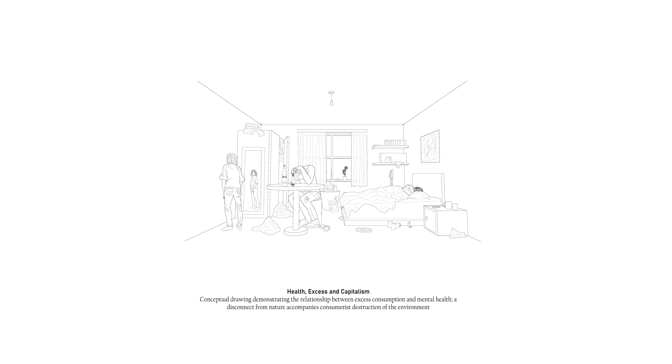It is not a simple rehabilitation of the human mind and body, but a rehabilitation of the landscape. As such, the design of the building cannot be divorced from an interrogation of its role as an object observing the performance of the changing landscape.

It is a simulation and reappropriation of the sense of memory evoked by the same scars of capitalism and industrialization that have left people with mental health and psychosomatic disorders.

This is examined here in a drawing relating the traumas deriving from capitalism to the typology of a messy bedroom, isolated from the natural environment. The process of rehabilitation hence involves a progressive reintegration of people into the landscape to enable both their own and the ground's recovery, with access to spaces charting their personal progress.

Hence, the rehab can be understood as a machine for human rehabilitation and rehabilitation of the landscape. The processes are related, with the patients becoming critical components of the mechanics of landscape renaturalization, and the form of the building negotiating and subsiding to the conflict between the controlled interior and organic exterior.

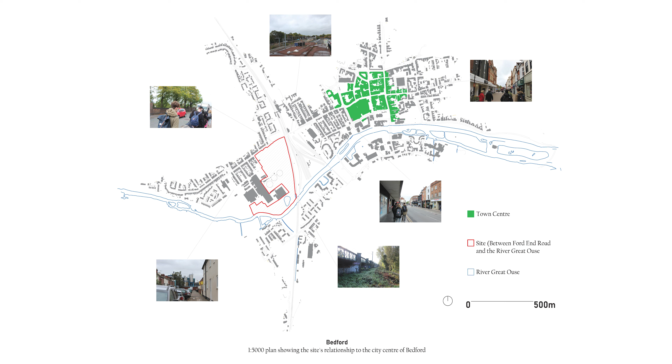Over time, in its improvement of the landscape, the building slowly becomes overrun by its own success and is destroyed. Bedford is located along the River Great Ouse, with the site being an interstitial terrain vague, located surprisingly close to the city centre, between Ford End Road, the railway, and the river.

As such, its hostile elevation of danger signs and barbed wire protrudes a slight sadness, communicating the sense of abandonment and deindustrialisation that upsets the surrounding area.

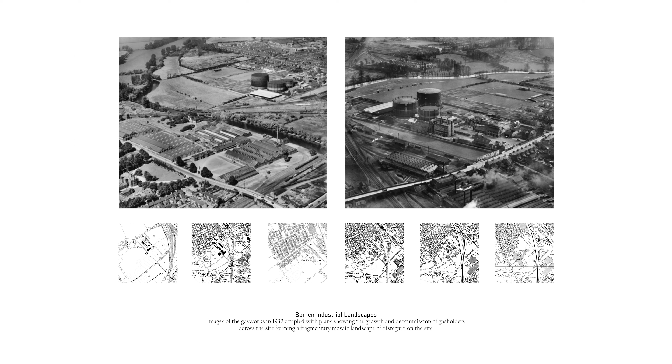An examination of the industrial past of this part of Bedford reveals a more landmarked quality to the site, something lost with the removal of the gas holders that used to occupy it.

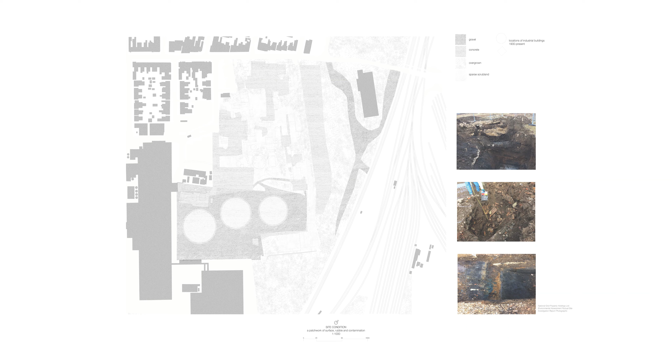In this, the site can be interpreted as a memorial landscape, with the ground condition revealing a fragmentary mosaic of landscape of disregard, where tarmac, gravel, and old foundations both allude to the town and the site's industrial history and poison the ecosystem.

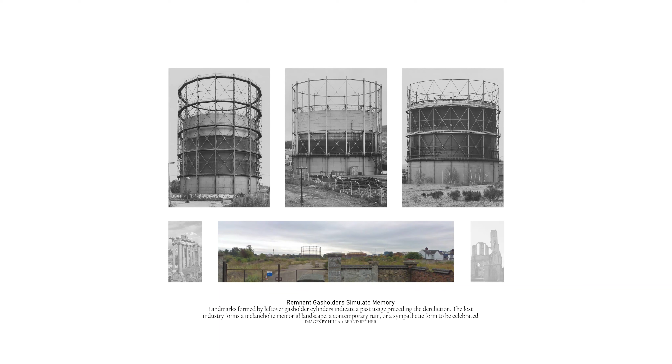Indeed, gas holders themselves are contemporary ruins, rendered redundant by modernised processes.

Their empty shells are sublime simulations of memories lost with their removal. In its current form, the site is barren, with a few weed trees and weeds communicating the dereliction of the ground. As such, the first stage of recovery demands a recovery of the landscape into something suitable for growing and reforming an ecosystem.

Georges Descombes' renaturalisation of the River Aire project saw the excavation of a diamond grid of ditches along the route of a river in a manner that allowed the river to form its own path and break up the soil in a manner to enable plant growth.

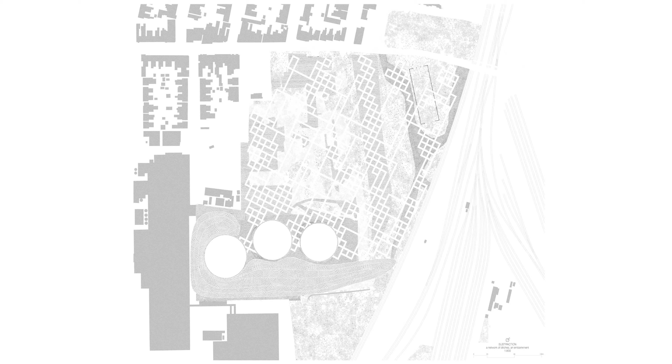A similar proposal seemed appropriate for the site. Removing earth to form 2-metre wide ditches in a particularly dense pattern around the more contaminated areas creates an opportunity to use the gentle slope of the site and the fact that the site forms a topographical sink for the rest of Bedford when flooded.

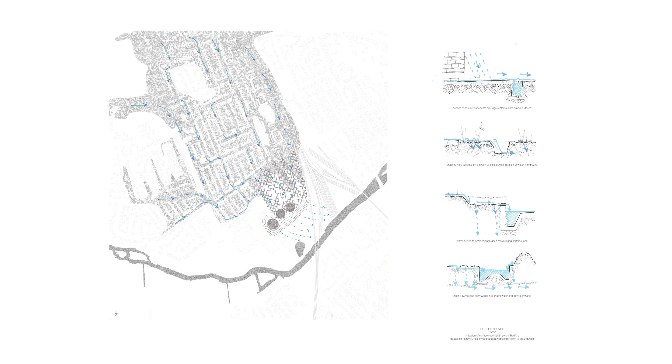This would send increasingly common floodwater from the town, owing to the climate crisis, into the ditches, leading down to pools formed by three exposed gas holder foundations.

In doing so, the water would gradually erode away at the harsh edges of the ditches, changing their condition into a more naturalised form, whilst also breaking up the dense contaminated soil in a manner that would allow for an easy planting of hyperaccumulators.

These are plants that can be used to naturally phytoremediate the ground, as they are biologically predisposed to take up the heavy metals and contaminants that scarred the landscape. When removed, gone are the damaging materials.

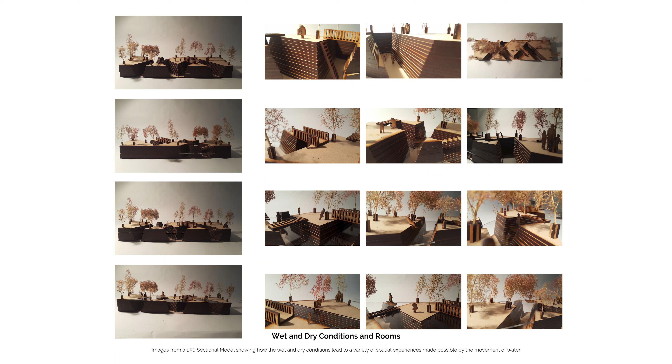The process of flooding and drying would allow the site to oscillate between a temporal wet and dry condition, creating varied spatial experiences between the growing trees and plants.

On a more macroscopic timescale, this iterative erosion would create a much more natural form of ditches, and a remediated landscape with a thriving ecosystem, in stark contrast to the current neglected space.

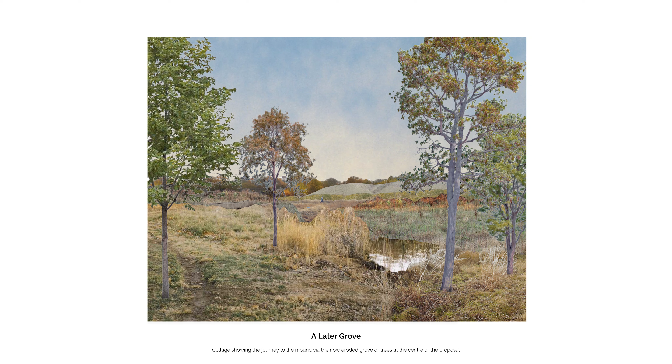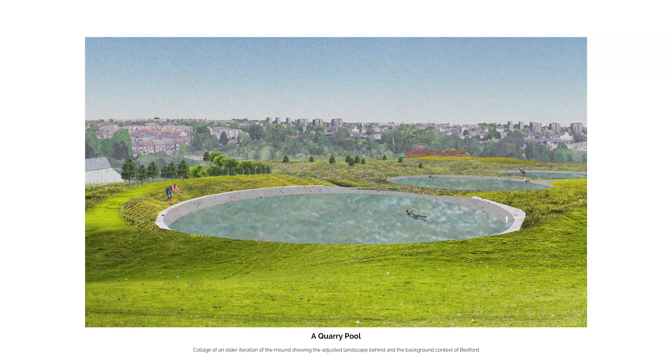These spaces would lead down to the pools, bound by a mound of excavated material, where the retained water would make an appropriate space for bathing. In this process, the remediation of the landscape unifies a civic action in the formation of a public park with a flood defence and a renaturalisation of the site.

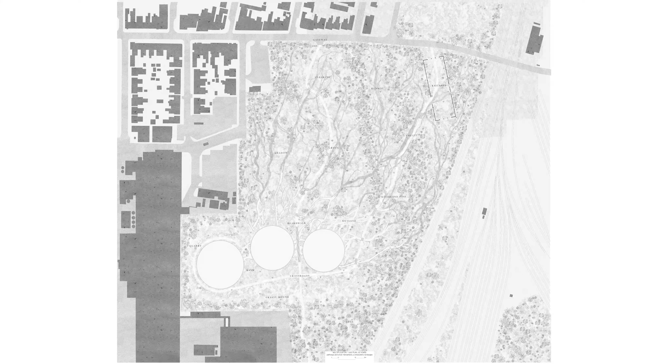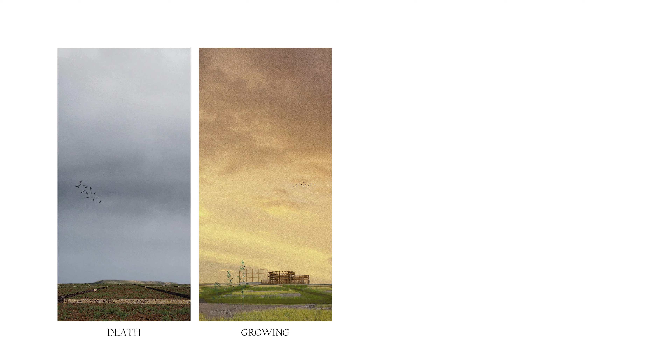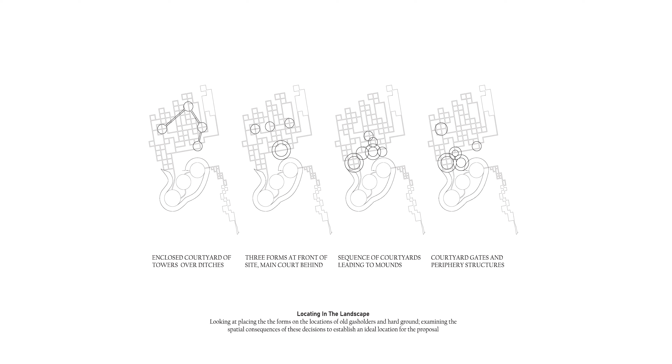The growth of new plants and the beginnings of recovery of the site mirrors the growth of the new structure, which seeks to echo the memory of the past gas holders in its relationship to the streetscape. The location of this form was considered against an expanded ditch network, which allowed for increased space for plant growth, while also zoning the expansive landscape into different areas between and around buildings, which can be sequenced to create a theatre and a sequence of spaces moving between open landscapes into varying sizes of courtyard.

I sought to use this structure to create spaces for multiple forms of therapy and occupation, maintaining a relationship with the landscape. The final iteration settles on a distinct zoning of the site, with the open network of ditches leading down through the structure into a courtyard of low planting, bound by a more formalised mound.

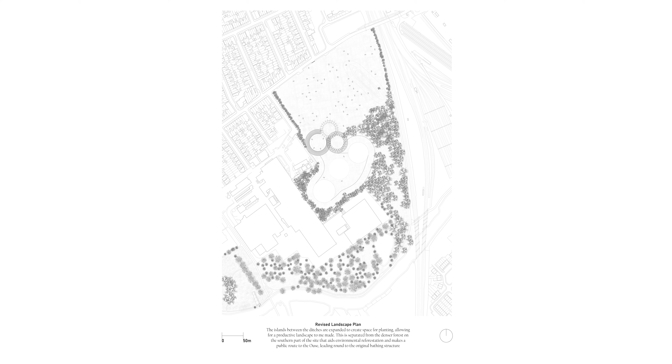This open area is separated from a denser forest of new willow trees leading down to the river. The round forms create a defensive structure that allows for panoramic views of the landscape and creates a threshold of privacy where the main sequence of courtyards are controlled and separated from the evolving surrounding landscape.

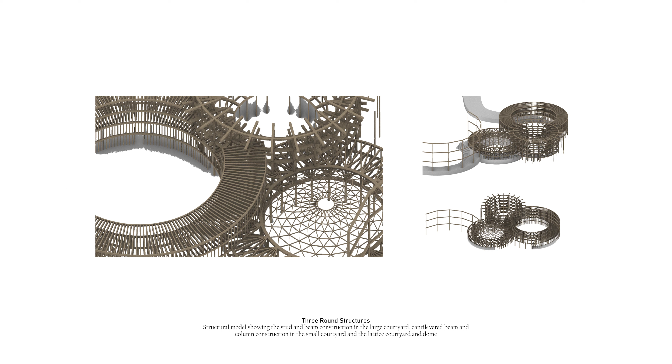The glulam structure combines a series of column and beam constructions of varying densities, resulting from tests matched to the program of each courtyard, with this page showing the materials used to eventually build up the structure into a rehab. Although the structure demonstrates a quality beyond its ephemeral human use in its relationship to the landscape, there's a distinct phase that accompanies its human rehabilitative function.

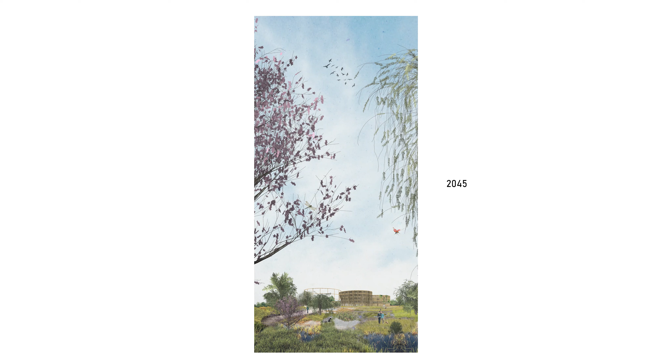There's a distinct phase that accompanies its human rehabilitative function. After 25 years of naturalisation, one might expect the rehab to sit amongst a more renaturalised landscape, one it is immensely integrated with, mirroring the site's development.

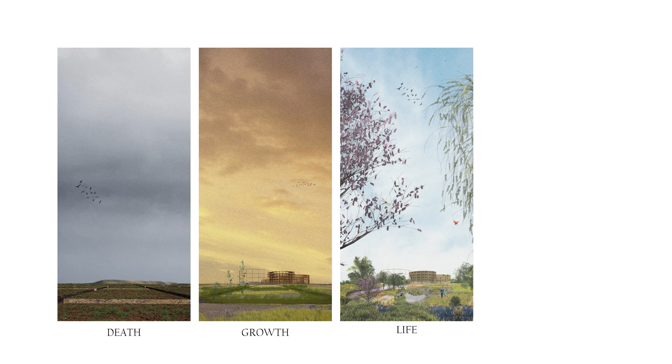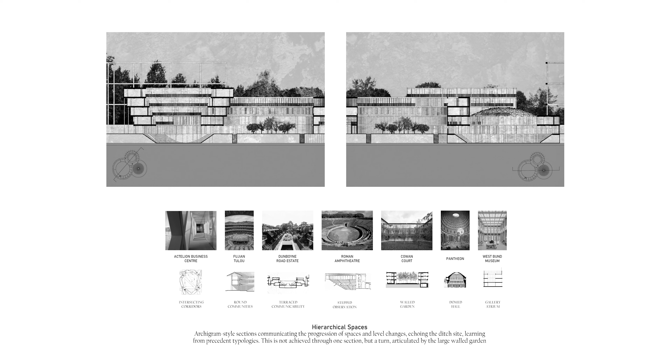I sought to create a variety of spaces at different scales to engage in therapeutic activities related to the landscape. Iterations of the design compared elements of the courtyards to different precedents and adjusted them to create a controlled yet theatrical sequence of spaces to accompany the temporal progressions of the surrounding ditch landscape.

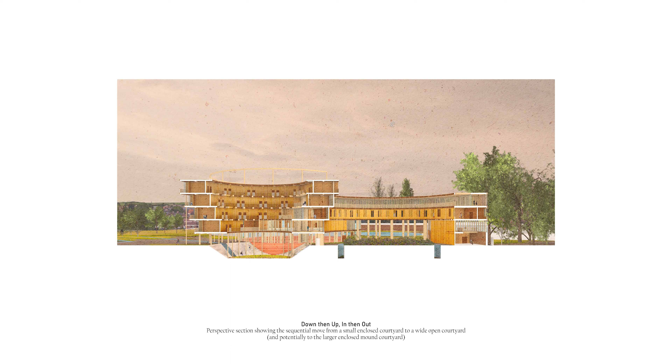This sequence begins with a progression that takes one from a small enclosed courtyard, below a small step-back Tulou-style courtyard that allows for the penetration of light, back up into a large, wide, open-walled courtyard leading around to the large courtyard of pools created by the mound, or down into the large hall courtyard, which embodies an unexpected delight in the act of moving down into a surprisingly large enclosed space.

The perspective sections show how corridors are created at the intersections of the courtyards. The loops of the floor plans intersect such that continuous, cornerless corridors are created, something not enabled by previous rectangular iterations. In this way, the scale of the progressively longer loops of the floors can be used to chart the progress of a healing patient.

They might begin by only being able to walk around one floor, but can move to larger floors, the whole mound, and soon the entire landscape as they progress in their recovery. As such, they can become progressively more integrated with the recovering landscape.

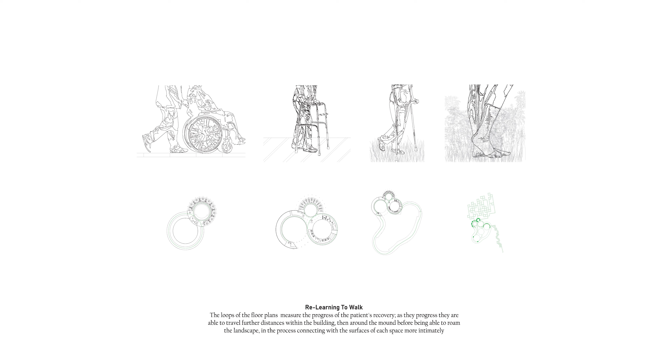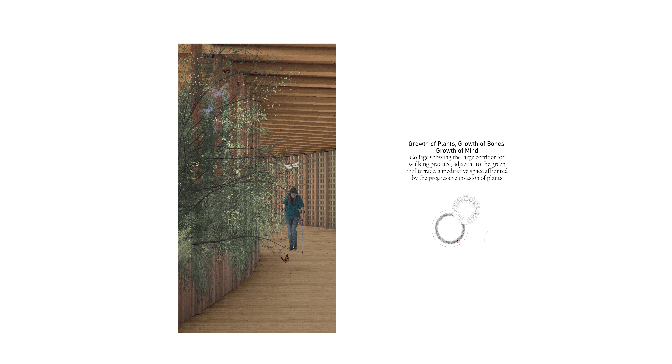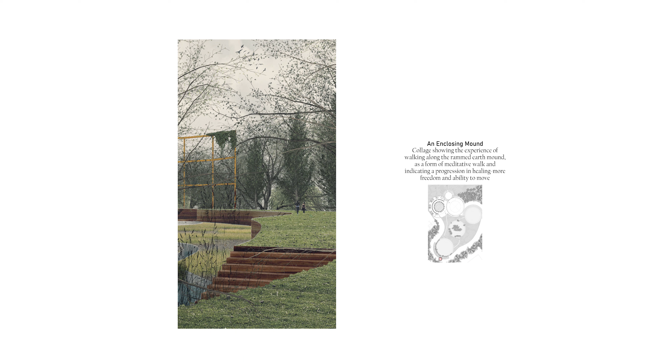This is along a walk landmarked by the new timber gas holder frame. This shows how compacted rammed earth and lime are used to make the mound.

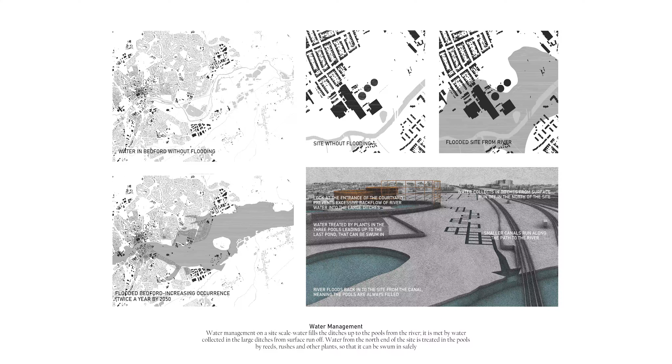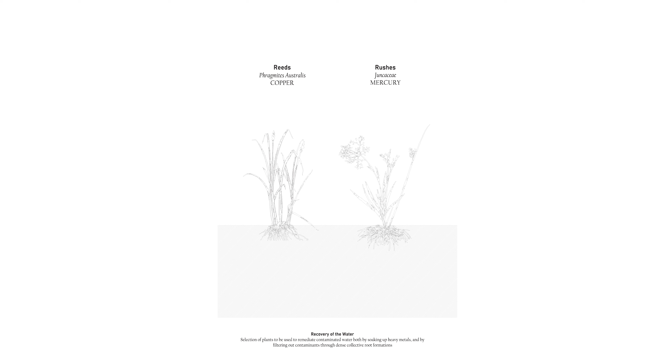The pools indicate the building's larger mechanical role in water management of the site, with the canal creating a constant wet condition in the three pools, but where the sequence of pools in the courtyard allows contaminated water from the site to flow in and be remediated by plants which filter the water, such that by the third pool it is safe to swim in, shown here at the conclusion of the mound as a space enclosed by the gas holder frame and leading back into the hall courtyard.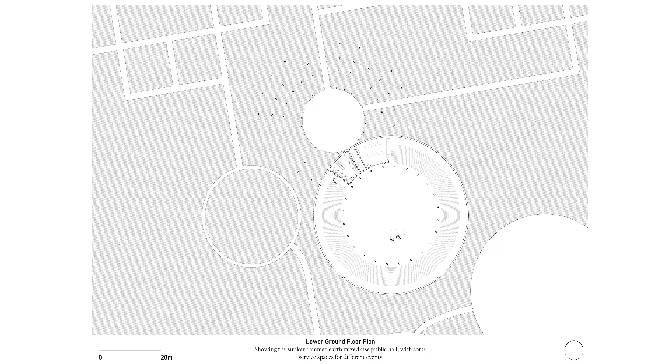The plans of the building sequester various functions. The large courtyard contains a plant store for plants being removed from the landscape, whilst the large hall occupies a triple height space. The hall has a separate public entrance, as it made sense to retain a public segment of the building to match the civic notion of the renaturalised landscape park.

The first floor contains a mezzanine for walking above the plant store, with larger therapy rooms and the library forming a raised gallery above the hall.

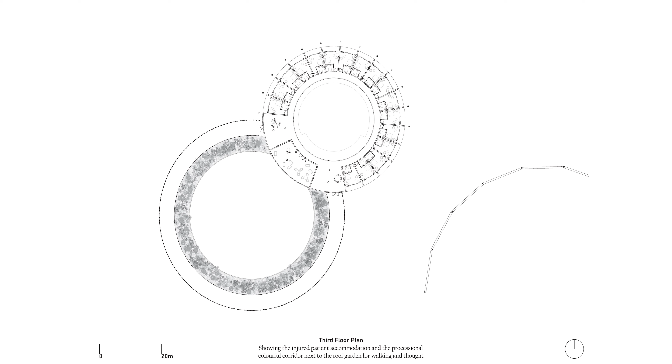The second floor contains spaces for art therapy and a gym, in addition to smaller consultation rooms. This floor has views out to the rest of the courtyard and, like the rest of the building, uses calming exposed timber. The other floors feature the walking corridor and more accommodation spaces.

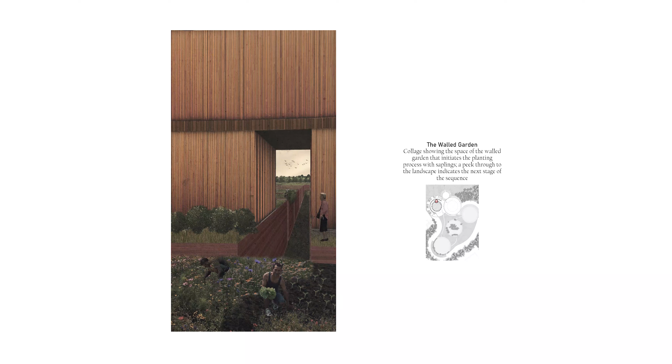In order to remediate the ground, plants such as sunflowers and bamboo, chosen for their quick growth, must be planted and removed on a frequent basis. This process is enabled and articulated by the building.

The walled garden creates a controlled environment for sapling growth, whilst including a gap to link it to the surrounding landscape. When matured, these saplings are transferred to the surrounding landscape by the patients.

In this way, the process of remediating the landscape is simultaneously a form of therapy for the patients, giving them an opportunity to engage in horticulture.

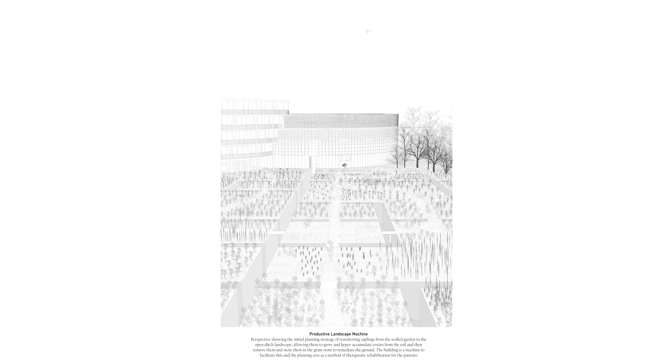In this way, the building becomes a machine, animated by its human components who pulse in and out of it to create a productive, healthy landscape.

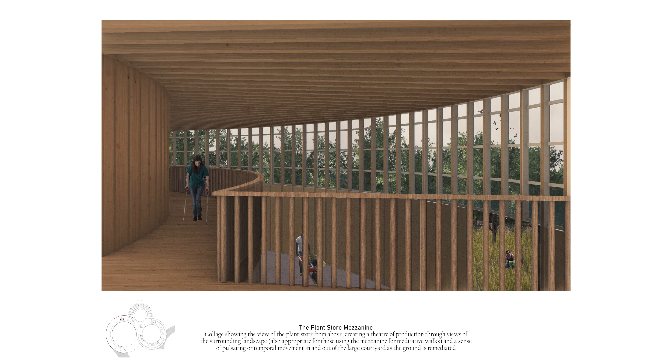This theatre of production is concluded within the plant store, where the process ends as the toxic plants are stored inside. This collage shows the mezzanine for walking, where the window offers views out to the landscape, and a viewpoint for the procession of materials in and out of the building.

This recovering and changing landscape is what in turn results in the building becoming overcome with its own climbing plants, such as wisteria. Its pile foundations allow it to resist the gradual erosion of the ditches around it, whilst the green roof allows for green space to occupy the space outside the ambulatory.

The sensitive and variable relationship between the building and the landscape is maintained by temporal changes. The accommodation courtyard becomes flooded in a wet condition, making a swamp landscape underneath and introducing the surroundings into the centre, emphasising the conflict and dominance of the form in the landscape.

The centre of the courtyard itself echoes a Hakka tulou, with circular public walking corridors creating opportunity for community, with an equivalence to the rooms not seen with rectangular forms.

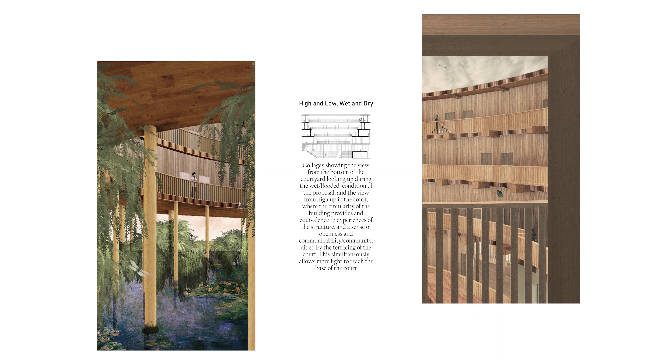This was adjusted from a previous iteration to be terraced, which allows for greater communicability between different levels and stacked corridors, and allows for more light to reach the base of the court.

This relationship to the landscape contrasts with that of the outward-facing patient rooms. Here, each room has private balconies for reflection and large windows to view the landscape, with its changes on both the daily rhythmic and time-progressive level mirroring the recovery of the patient and providing a rhythm to their experience.

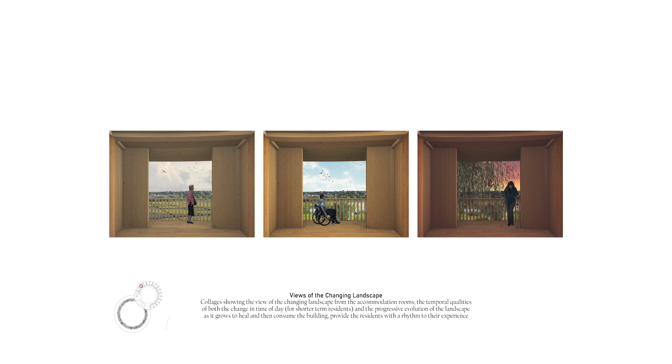The construction uses a glulam frame for the cantilevering rooms. These columns are water-treated at the base to remain integral during the wet condition. Plywood floor construction is sandwiched between the exposed glulam structure within each room.

The intersections between the courts provide opportunities for delight, where the structures of each court allow controlled views of each intersection, such as here where a peek into the large courtyard from the accommodation courtyard is enabled, and where a forest of columns is created by the exposed structure in the corridor.

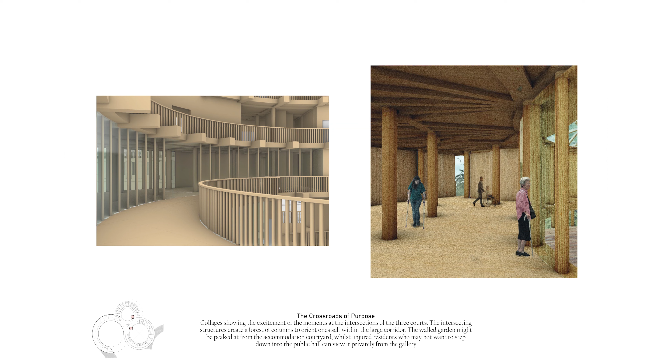This corridor provides a viewing gallery for the activities of the public hall for patients who do not want to completely engage or merely wish to animate their day.

The space of the hall is animated by its relationship to the surrounding nature. The rammed earth floor is constructed similarly to the mound itself, with a drainage channel surrounding it to avoid it becoming flooded during the wet condition.

The large dome atop the hall creates an awesome space exposed to the movements of the sky, filtered through the trees of the willow forest.

Different lighting conditions may make it appropriate for different activities: a food market in the morning, a sports or dance hall in the afternoon, or a dance party in the evening. Each of these activities animates the space for those viewing from above, continuing the civic intentions of the public park relating to the surrounding environment.

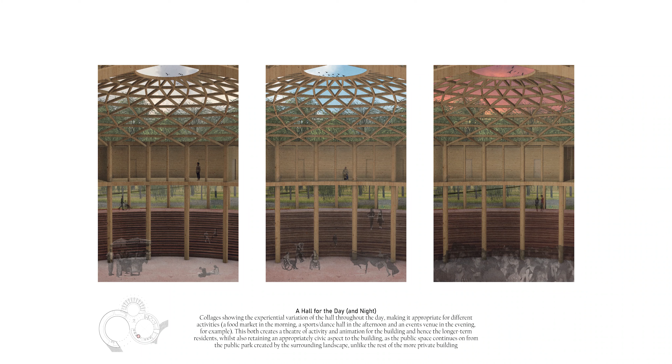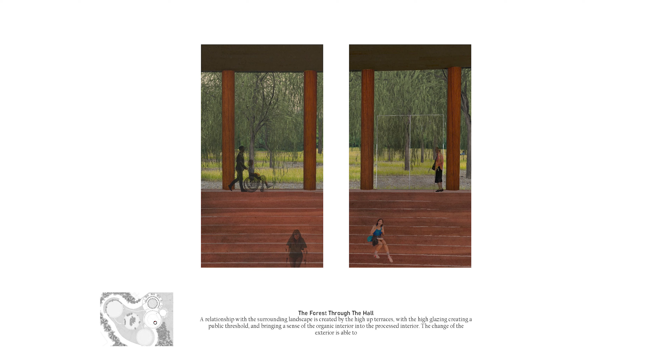Overheating is avoided by the lowest ring of windows being openable from the roof to allow for stack ventilation. The hall maintains a controlled but evolving relationship with the external willow forest, brought into the building through the glazed public threshold. Whilst the interior bears witness to the temporal evolution of the landscape, from the exterior the hall participates in an oscillating game of hide and seek.

In the winter or early stages of growth of the willow forest, the hall is translucently visible through the branches, becoming more hidden as the landscape matures. However, this long-term hiding is punctured on a regular basis when, at night, the lights from the hall allow it to reappear through the leaves and branches.

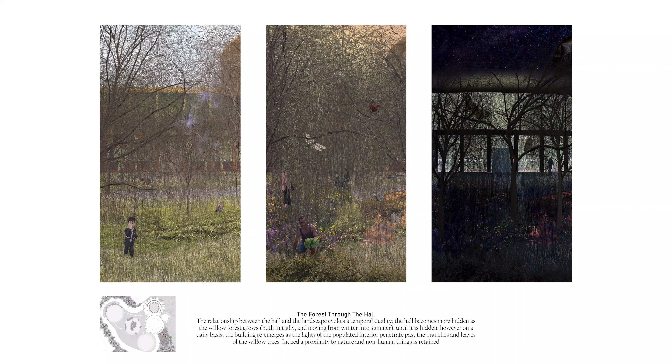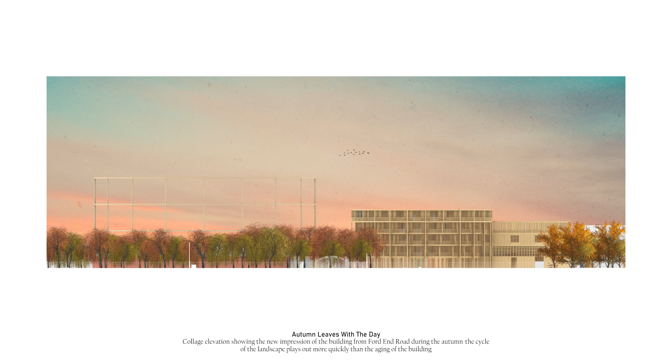The building's relationship to the surrounding nature and the elevation along Ford End Road changes with the seasons. Indeed, the building appears to remain a steadfast landmark amidst temporal colour changes and experiential variations of the months and times of day. At night, the building disappears, becoming an ominous or sublime echo of the past gas holders on the site.

Whilst appearing to resist the frequent harsh weathering and temperature changes throughout the year, the slow result is a greying of the wood and an overcoming of the site with the life enabled by the building's role in its renaturalisation.

Indeed, this process of maturing provides a delightful and time-extensive uncertainty to the conclusion of the building. It echoes a ruin overcome by the thriving landscape ripening around it.

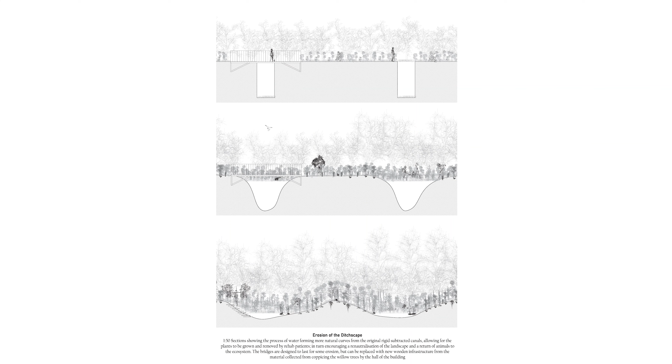The progressive flooding and weather changes, accompanied with the farming therapy of the patients, eventually create a more natural wetland space across the site, with a developed ecosystem demonstrating an empathy for non-human things.

While somewhat overcome with planting itself and becoming hidden in the more natural landscape, the building retains its defensive form and maintains its interior and the mound courtyard as a controlled space. Exciting moments are created within the landscape, making it still suitable for human-scale engagement with the wetland, the pools, and the forest behind the mound.

The site has become a fully realised park, with the formality of the initial zoning being corrupted by organic growth in the open space in front of the building. The frame of the empty gas holder and the cladding in the large courtyard invite the growth of climbing plants that truly allow it to sink back into the landscape.

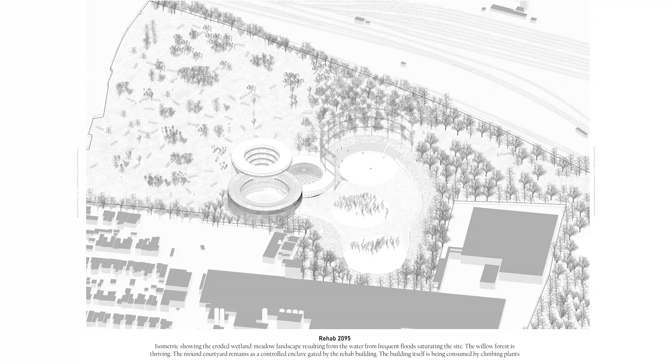In the creation of this park, the site is transformed from a neglected mass into a public space, connecting Ford End Road to the River Ouse, a distinctly civic action. This journey between the road and the river is marked out by the landmark of the empty frame, which emerges behind the now mature willow forest.

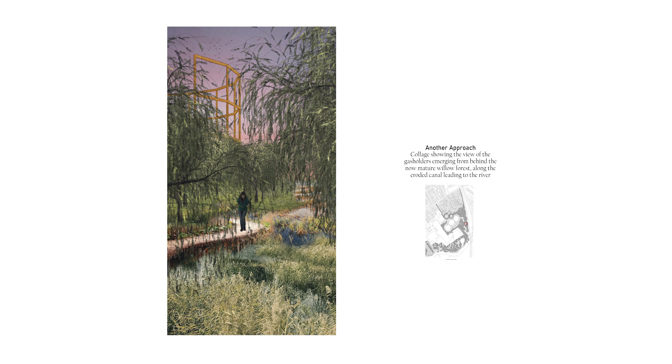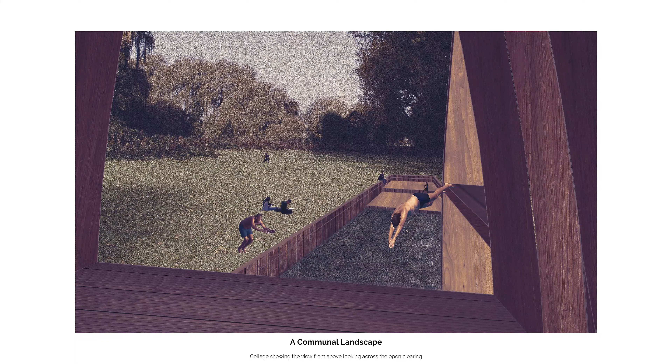This fully realised connection might serve as the longest walk facilitated by the building, connecting the landscape to the river, where one might engage in wild swimming, shown here with the bathing proposal designed earlier. However, whilst designed around human usage, much like any ruin, the proposal's state of occupation is perhaps its most ephemeral.

As the UK's gasholders themselves present a living memory that will outlast the active life of the forms, we might expect the form of the rehab to outlast its rehabilitative purpose.

Contemporary capitalist consumerism has not been sufficiently abandoned. As such, the world will reject us with rising water and forest fires. What might we anticipate for this site when future inhabitants of the world are exposed to the obsolete structures we hold so dearly today? This envisages the result of a flooded and burned out structure.

One might call this fatalistic, but this is perhaps a misinterpretation. Degrowth might demand that humans, the greatest destroyers of the earth, abandon it entirely. In this late moment presents an optimistic moment for the planet and its non-human inhabitants, who might be free of its greatest oppressors.

The building hence completes its resimulation of the process of use and abandonment of the gasholders itself, becoming an obscure object of past inhabitation. Amongst this, we all continue to exist. And so at this time, whilst the will to solve the climate crisis cannot be located, we might find a gentle opportunity to rehabilitate ourselves and the landscapes as best as we can, free ourselves from our ills, and stand barefoot in the park.